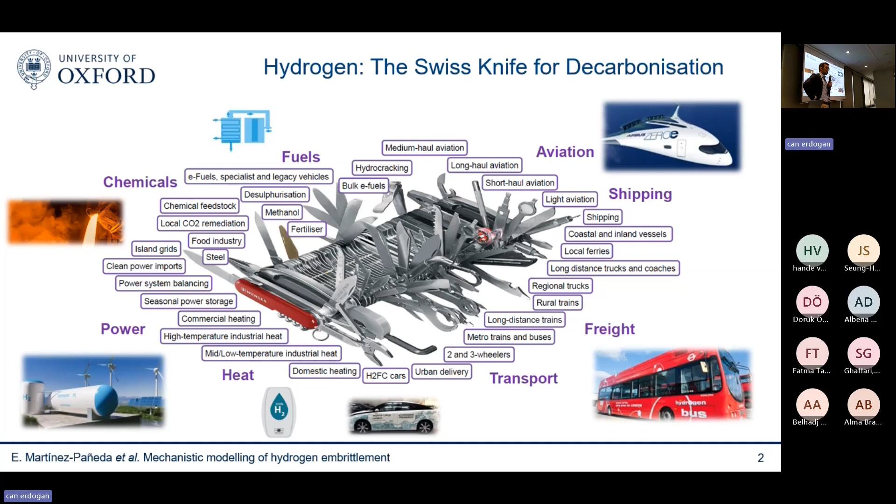You have probably seen in the news that there's significant interest in hydrogen these days, due to the fact that it has the potential to decarbonize many applications and sectors, including some known to be very difficult to decarbonize, such as aviation or steelmaking. We cannot think of any other alternative in that case. So it seems we are going to have to deploy, over the short term, a hydrogen energy infrastructure. And that's going to be a challenge, because we've known for quite a long time that hydrogen embrittles metals.

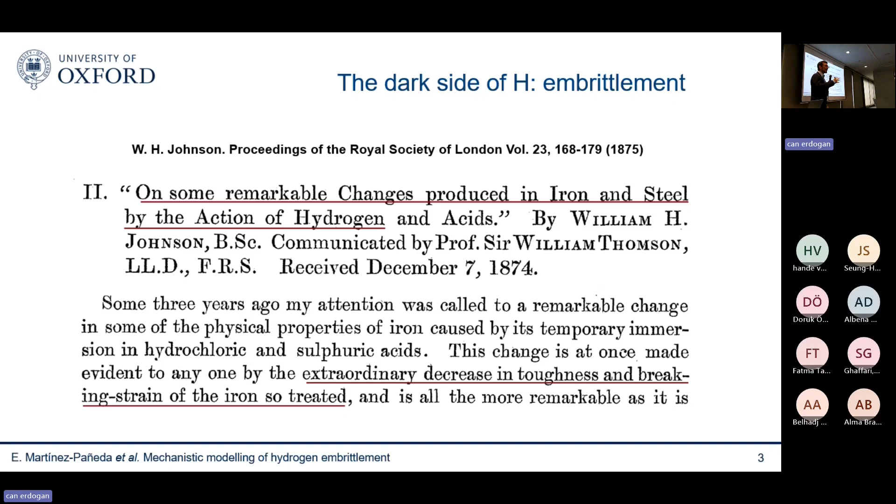This is something we've known for almost 150 years. Here is a paper by Johnson, published in the Proceedings of the Royal Society back in 1875. He talks about some remarkable and extraordinary decrease in toughness and breaking strain in iron and steel in the presence of hydrogen. In those days, you rarely see words such as 'remarkable' or 'extraordinary' in scientific papers. But the way hydrogen interacts with metals is indeed quite remarkable and extraordinary.

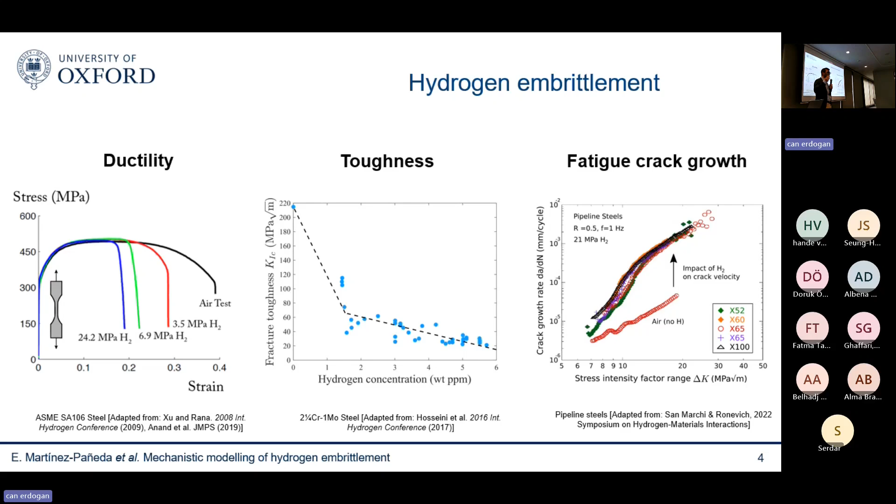So this is, of course, a problem because we need to develop this hydrogen energy infrastructure. This doesn't exist at the moment. Yet the materials we want to use for that infrastructure are going to be very susceptible to the presence of hydrogen. And it's a problem because we want to be able to predict these things quickly, to understand under what regimes of operation are safe. So that's an opportunity for models.

And of course, the fact that metals are so sensitive to hydrogen is a problem, and has been a problem for a very long time, particularly in oil and gas and quite aggressive environments. Now, with the development of high-strength steels, like the ones we heard about in the previous talk, we're seeing more susceptibility to hydrogen embrittlement, and this problem is expanding to other applications and sectors, for example civil engineering, construction, and even the automotive industry. Whenever you're using high-strength steels, you're going to have hydrogen problems.

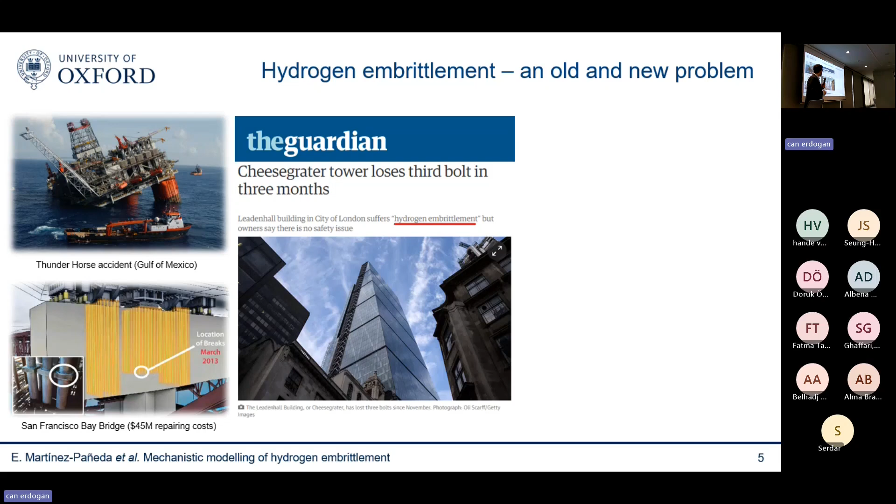Because again, hydrogen is everywhere. You can have hydrogen coming from humidity, from the manufacturing process, and so on and so forth. And of course, this is going to be a problem for what I discussed before: we need to deploy a hydrogen energy infrastructure, and accidents are going to happen.

This is very early days of the technology. Very few countries have started to develop a hydrogen energy infrastructure, and those who are doing it, like Norway, have already seen accidents as a result of hydrogen embrittlement.

So a lot of questions come to mind. You see here this newspaper article in the UK, from last year. They were hoping to have hydrogen gas in the natural gas pipelines. They have decided to wait one more year to fully understand under what conditions those pipelines will fail.

Again, this is an opportunity for modelers because we really need to make decisions quick, and we need to map a very wide range of situations that are not easy to test in a lab. This is full-scale engineering testing in a way. So it's also a big challenge for modelers, an opportunity and a challenge in that we need models to urgently map safe regimes of operation.

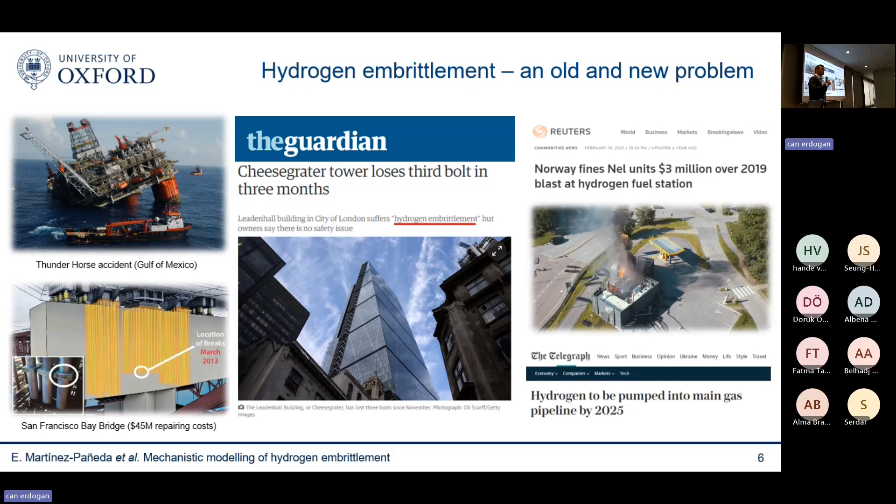To understand under what conditions we can transport and store hydrogen. But at the same time, we don't have the luxury to calibrate our models with experiments. We need to be very confident in our models because we need to predict things full scale without any sort of calibration or validation. So we tried to address that challenge in my group by trying to be as mechanistic as possible, trying to resolve the underlying physics as explicitly as we could.

I'll start by telling you a little bit of that modeling framework, which addresses each of the stages involved in hydrogen embrittlement. I'll then show some representative results, and then finish with two case studies that I hope will be of interest to you: can we predict hydrogen-assisted fatigue? These are very expensive experiments, difficult to reproduce, combining the complexity of both fatigue and hydrogen embrittlement. And also, can we determine safe regimes of operation to transport hydrogen in existing natural gas pipelines?

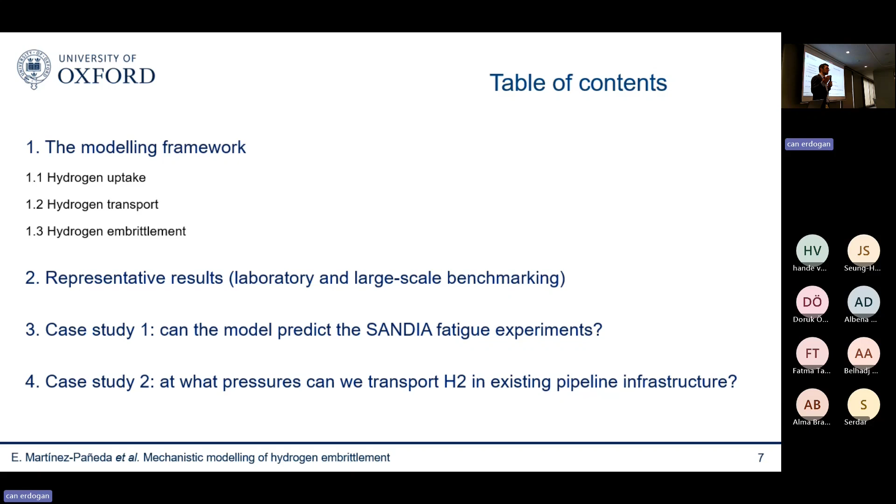So let me start by describing the modeling. The model has multiple ingredients, and I'll describe them based on the different stages. Whenever we want to understand hydrogen embrittlement, we need to understand the uptake of hydrogen in the metal, how much hydrogen is coming in, the transport of hydrogen within the metal, how it's structured in the microstructure, and then finally the embrittlement process per se, how the hydrogen nucleates and grows cracks inside of the metal.

The philosophy we try to take here is that in order to predict those full-scale engineering problems, we cannot rely on parameters that need calibration because we won't have the luxury to calibrate. So we try to maximize physics and minimize assumptions and parameters. At the end of the day, in an ideal world, we want a model that relies purely on material properties we understand and can independently measure, like Young's modulus, strain hardening exponent, diffusivity. Those things we like. We don't like alpha, beta parameters that need calibration.

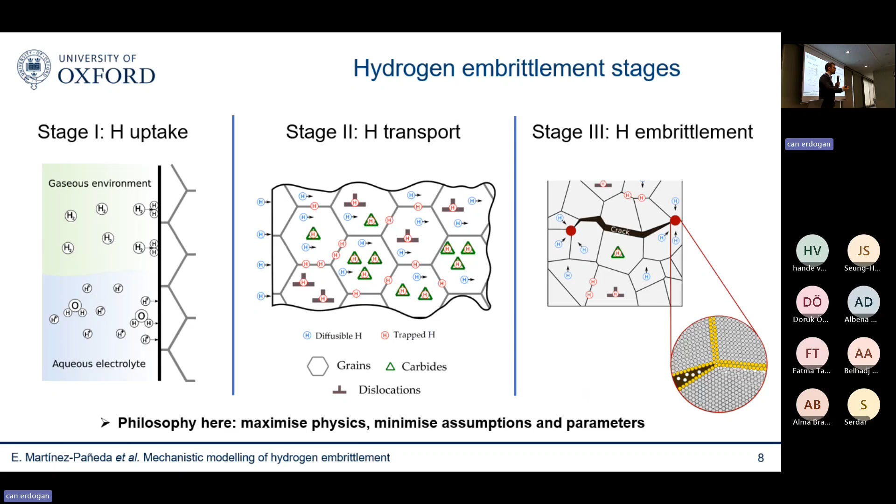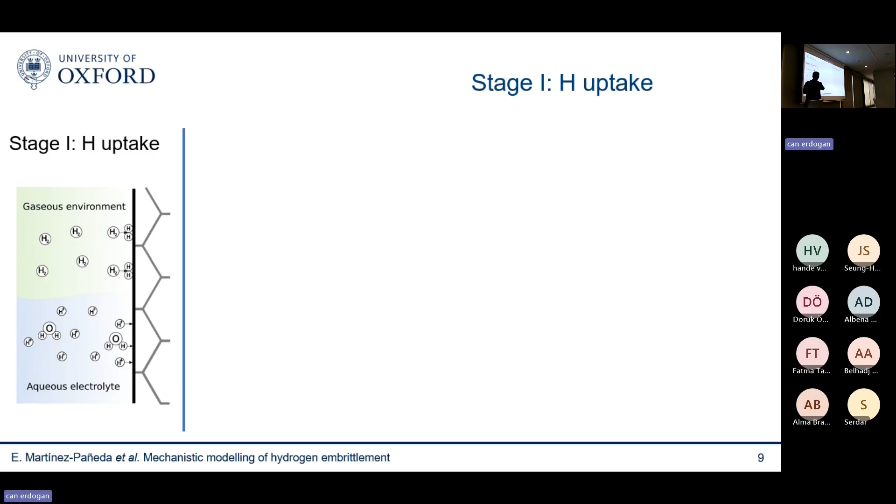So let me tell you a little bit of how we do this. First we go to hydrogen uptake. Here the goal is for a given environment, quantify what hydrogen you have in the subsurface of your metal, how much hydrogen is coming in. This is difficult because hydrogen comes from multiple sources, through forming, coating, plating, through exposure to any hydrogen containing molecule, through corrosion processes. Hydrogen can come from many places.

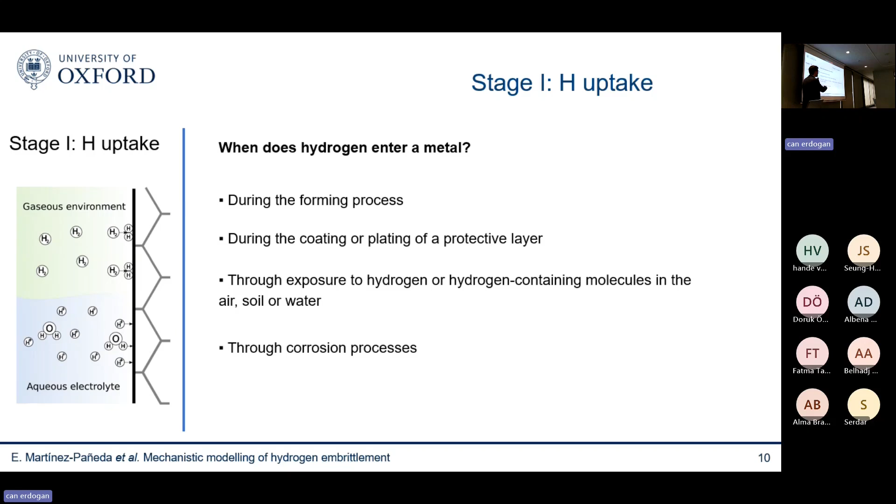I'll focus mainly on two scenarios. One, gaseous environment, relevant to energy applications whenever we have hydrogen gas coming in, or an aqueous electrolyte, the situation where you're exposing your metal maybe to seawater or any other aqueous electrolyte.

For the case of the gaseous environment, the good news is that under steady state conditions, there's a closed form solution, what we call Sievert's law. That basically relates the characteristic of the environment, the hydrogen pressure pH2, which you pick as an engineer, to your hydrogen concentration in the lattice, in the subsurface of your material. So this is good, it's an analytical expression. The only thing I'd like to say is that this depends on the solubility of your material, which you can measure with a permeation experiment, but it also depends on this exponential term, which has a hydrostatic stress term here.

I want to emphasize this because sometimes people in the community forget about the mechanics contribution, but the mechanics contribution can be quite strong. You cannot capture this when you do a permeation experiment, so one has to be very careful.

Whenever you're doing a permeation experiment, you're going to measure a stress-free solubility, but what you care about is how much hydrogen is coming in when you have a pressure vessel with a crack. And when you have a pressure vessel with a crack, you have an exponential term with a hydrostatic stress, which of course is going to be very large near cracks. So the mechanics contribution is important and should not be ignored.

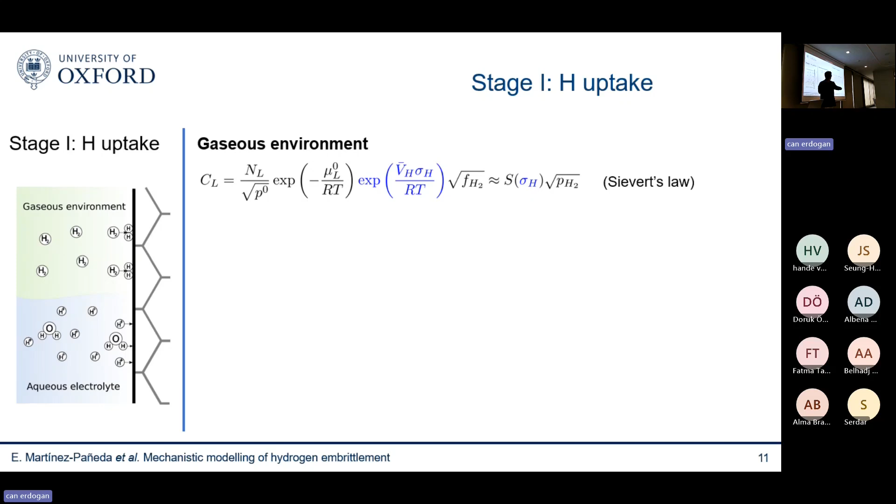But anyway, that's good news. This is a closed form solution. If I know my solubility, if my finite element tells me what is my hydrostatic stress, I know my pressure, I know my hydrogen concentration.

When we have aqueous electrolytes, the picture is much more complicated, and it's of interest for the energy application to understand the correlation between gaseous and aqueous electrolytes, because we are trying to use historical data. Running experiments on hydrogen gas is quite complicated, expensive, and a health and safety challenge. But running experiments with hydrogen from the aqueous electrolyte is much easier, and we have decades of experimental data from there. So we're trying to correlate both.

But it's difficult for two reasons. One is that you need to resolve not only the surface reactions, but also the electrochemistry of the electrolyte. Because, as anyone in the corrosion community will tell you, the conditions of the electrolyte in the bulk, where an engineer can measure them, are very different from those inside occluded electrochemistry, such as cracks or defects. So that's a challenge.

The good news is that we know how to express mathematically, from mesoscale first principles, what happens there. So we have Nernst-Planck equations, and these equations depend on diffusivity, Faraday's constant, temperature, and other physical quantities. Then you can also resolve the hydrogen evolution and absorption reactions happening at the crack tip.

So you can express this mathematically, implement it into your finite element code, and then you have a boundary value problem that looks like this, where you have an electrolyte where you're solving for as many ionic species as you need. Then you have a metal, which may contain a defect, where you're solving for your mechanical problem, for the hydrogen transport problem, and then you're solving for some interface reactions in between.

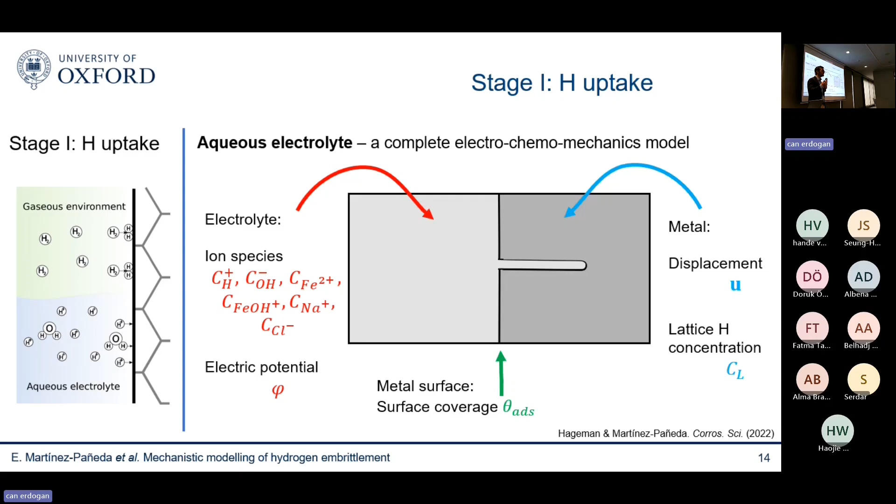All of these are degrees of freedom, and back in the day, or 10 years ago, it was difficult to solve a problem with 10 or 15 degrees of freedom per node, but now we can do those things much more conveniently. We've also done quite a lot of work on trying to accelerate those calculations with lumped integration schemes that I won't have time to discuss.

Anyway, once you solve the system, this is what you end up with. This is a typical quantity - you solve, for example, pH inside of the electrolyte. You can see that it changes quite dramatically inside of the crack compared to outside of the crack, as you would expect. Then you can predict the hydrogen uptake as a function of time, as a function of your material, as a function of the fluid flow, as a function of applied potential, and so on.

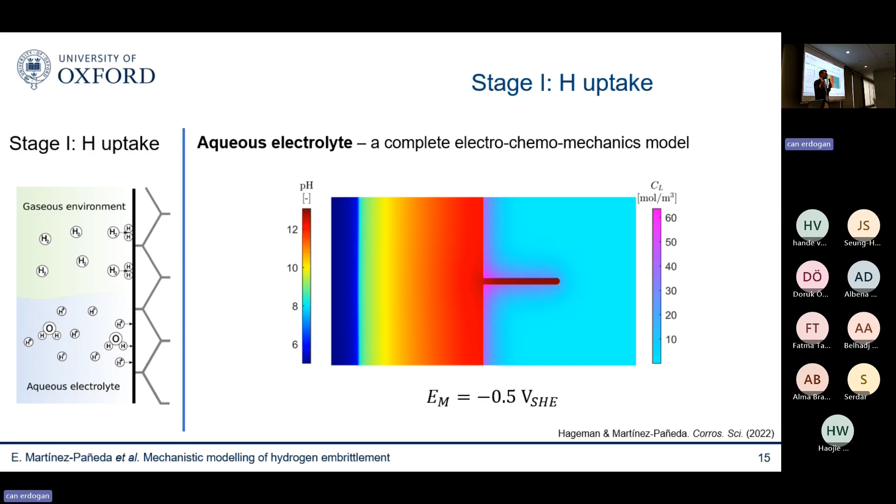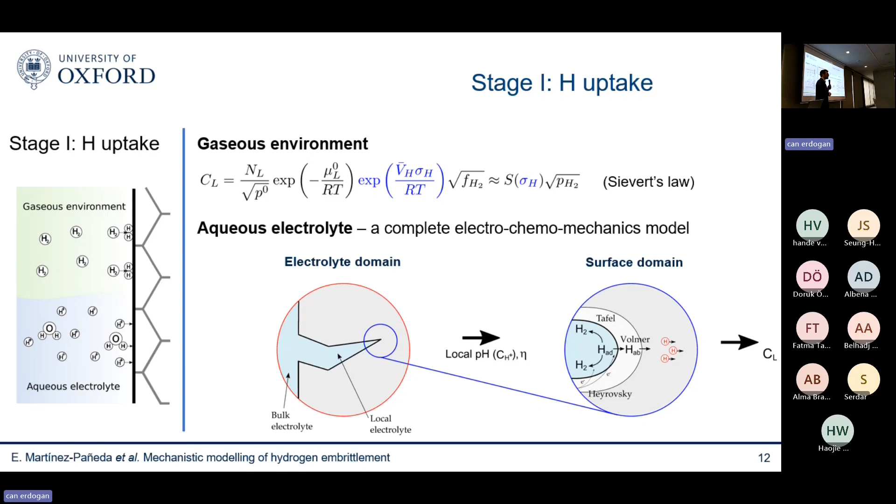This is just a representative result, but the end point is that for whatever environment you have, you're able to quantify hydrogen uptake. Then you can correlate that with SSRT flow, and you can also quantify how your electrochemical experiment gives you something similar to your hydrogen gas condition. Okay, so that's on the hydrogen uptake.

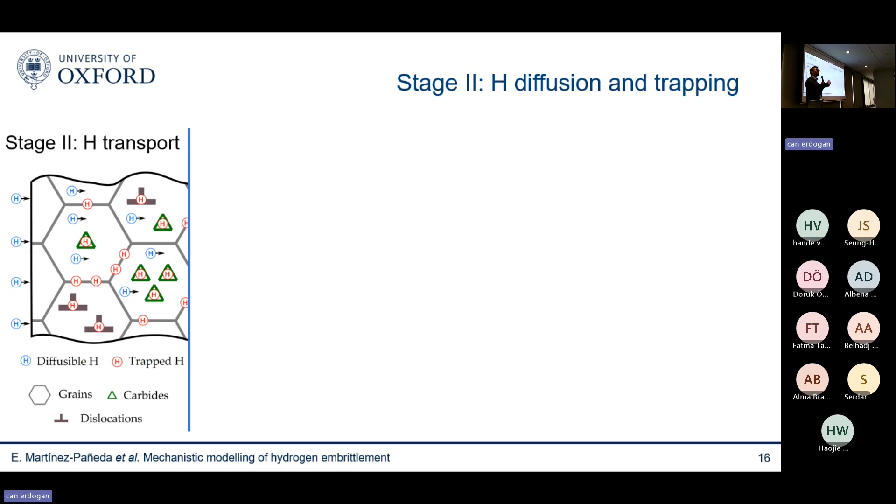So in theory, we have at least a method that is to a certain extent accurate in predicting hydrogen uptake. Now, once the hydrogen is inside the metal, the question becomes: how does hydrogen distribute within the component and within the microstructure? If we think of just hydrogen transport, it's relatively straightforward - it's described by an extension of Fick's law. So hydrogen is driven by gradients of concentration, and also gradients of the hydrostatic stress.

There's strong coupling with mechanics here, and this is a very important mechanical problem. If you solve this equation for the steady state condition, you end up with a situation where the hydrogen concentration depends on an exponential term involving the hydrostatic stress. So the hydrogen concentration is going to be very high near cracks and other stress concentrators. And this is only part of the picture.

Hydrogen not only travels freely through the crystal lattice, it's also sequestered. If you solve this straightforward equation, this coupled chemo-mechanical problem, in your finite element model, you get distributions of hydrogen concentration like this, for example in a pipeline with a weld. You can see how as you increase your pressure, the hydrogen diffuses through the weld, and you can do that also at microstructure scale. So this is relatively well understood.

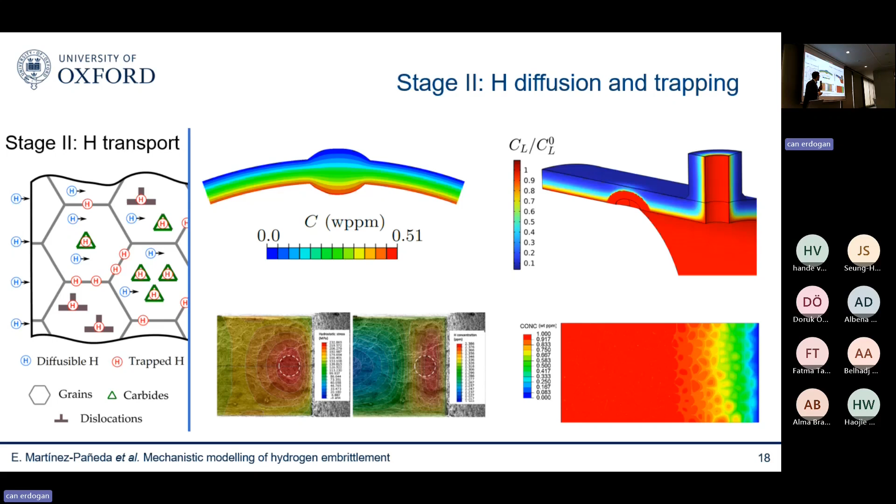Hydrogen is also sequestered or trapped on microstructural defects: grain boundaries, carbides, dislocations. So you need a theory that can encapsulate that, and we work with others on multi-trap theories based on Oriani or McNabb-Foster, where you incorporate the effect of each trap through binding energies that quantify how energetically favorable it is for hydrogen to sit in those places.

One aspect the community has overlooked is that if you want to know how much hydrogen is in your dislocation field, you must consider not only statistically stored dislocations but also GNDs, geometrically necessary dislocations. We heard in the previous talk about the importance of GNDs, and these are very important for hydrogen because, due to plastic strain gradients, they dominate near cracks and inclusions, and we can see this experimentally.

GNDs play a big role not only in quantifying how much hydrogen is in your dislocations, but also, as we heard in the previous talk, in strengthening and hardening mechanisms. GNDs act as obstacles to other dislocations, and that elevates stresses. This is something people have seen through a wide range of microscale experiments.

The implications in fracture mechanics are that if you look at the stress inside your crack, far away from the crack you can capture these GND effects through appropriate constitutive models, like strain gradient plasticity. Far from the crack tip these GND effects are small and can be neglected. But near the crack tip, because of very high plastic strain gradients, these GND effects become large, and your stresses end up much larger than those predicted using conventional theories like von Mises.

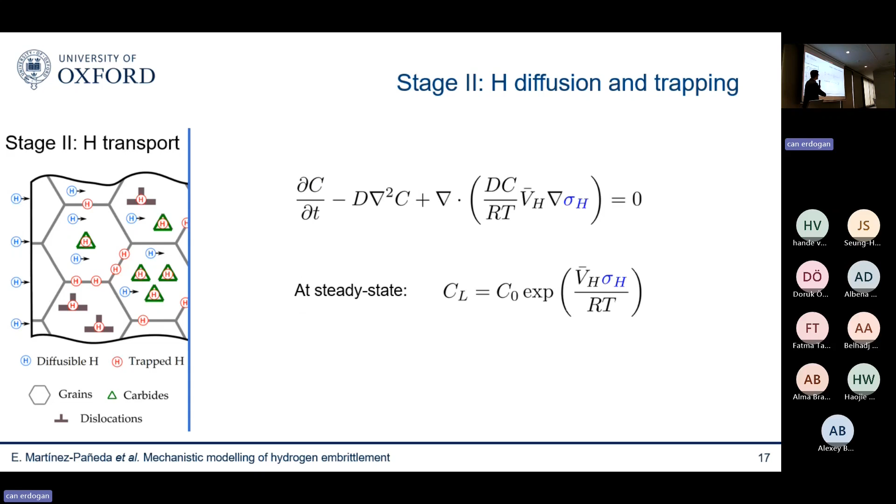This is very important for hydrogen because, going back to this equation, we have an exponential term that relies on the hydrostatic stress. So the hydrogen concentration is going to be much, much higher near the crack tip. As you'll see later, this is important for rationalizing the underlying physical mechanisms that drive hydrogen.

We've seen when running simulations combining these coupled chemo-mechanical models that account for the GND effects, for these strain gradient plasticity effects, that this is the only way to get good agreement with experiments. It's difficult to measure hydrogen concentration ahead of the crack, but some people have done it, and only by accounting for these GND effects are we able to capture the very high hydrogen concentrations that experiments show near crack tips.

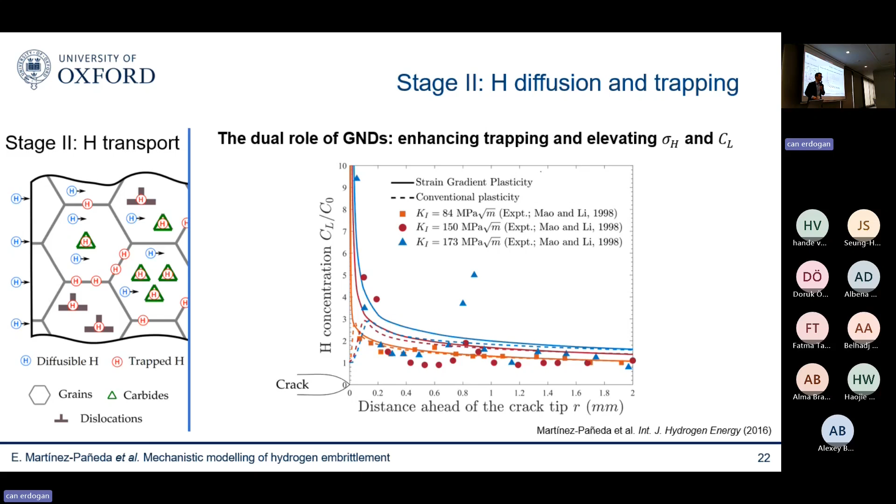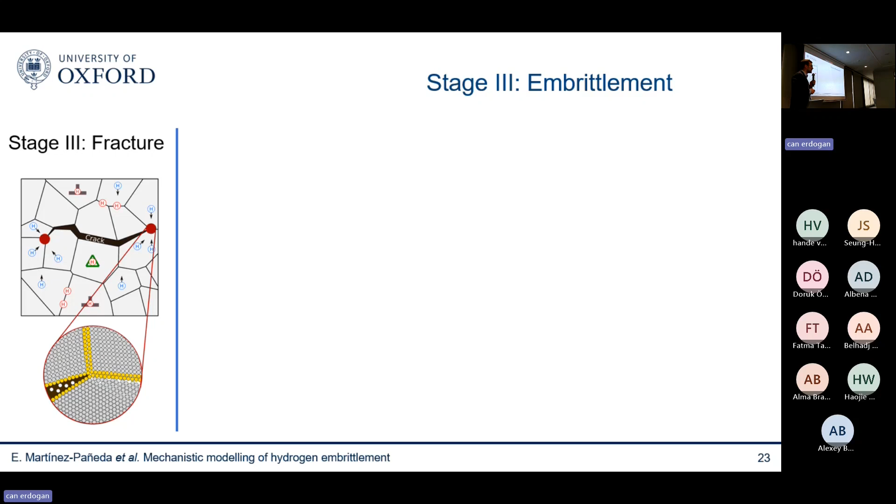Okay, so now we're moving to the embrittlement part. We know where the hydrogen is distributed within the component, and we also know where it's distributed within the microstructure, based on those binding energies I mentioned before. So now, what happens with the cracking process? I think there are two types of challenges in trying to predict when hydrogen embrittlement occurs. One is a physical challenge: what is hydrogen actually doing that facilitates the nucleation and growth of cracks?

The other challenge is computational: how are we going to couple this evolution of cracks through a component computation? These are interfaces, discontinuities. For that, we use phase field models that have been used in many science and engineering problems.

The idea is quite simple. You overcome the mathematical and computational challenges of tracking discontinuous interfaces by smearing that interface over a finite domain and using an auxiliary variable, the phase field, to tell you where the interface lies. The phase field takes a distinct value in each phase, say 0 in the blue phase, 1 in the red phase, and varies smoothly in between. If you define a suitable differential equation for the evolution of this phase field, you're able to capture interfacial problems of arbitrary complexity.

This implicit representation of interfaces is also very convenient for fracture problems, because you're defining your fracture equation, your interface equation, over the entire domain. So there's no need for any special treatment. Topological changes such as divisions or merging of interfaces, like crack coalescence or crack branching, are naturally captured without any ad hoc treatment. And finally, it's very well suited for multiphysics problems because you can combine this crack equation with any other equation you're interested in, like hydrogen transport or uptake.

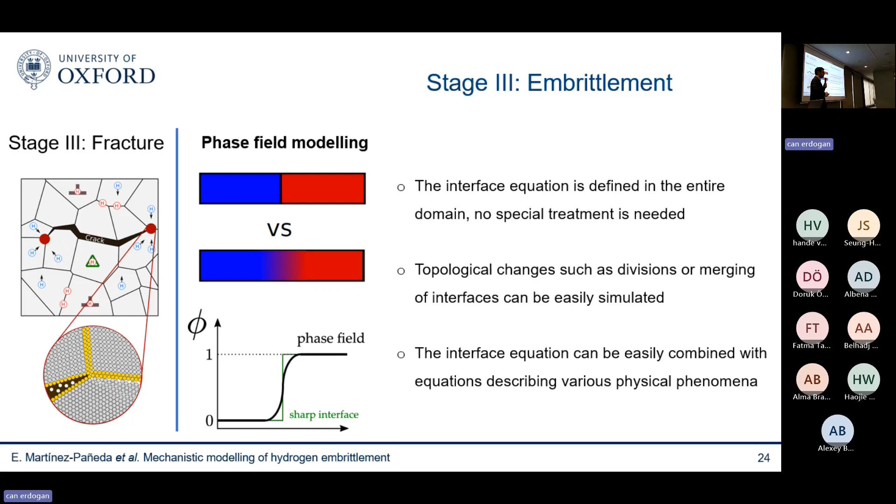Phase field modeling has really been a revolution in many areas of science and engineering. It all started in microstructural evolution, and it's now by far the most widely used technique to simulate solidification. We're interested in its application to fracture mechanics, but it's quickly becoming the dominant technique there too.

You can see why here—this is the outcome of a simulation of a hydraulic fracture process. That's why you see such a funny crack branching pattern. The model is able to capture very complicated behavior: branching, nucleation of secondary cracks, and coalescence of multiple cracks.

Also, recently—though I won't have time to discuss it today—we've shown that the phase field paradigm can be used to simulate corrosion. You can use the phase field to track the evolution of the corrosion front, the interface between the aqueous electrolyte, like seawater, and the metal, and how that electrolyte-metal interface evolves.

But I'm going to focus today on fracture. Going back to what I said before, the two challenging aspects of this problem are: first, mathematically, it's difficult to predict cracks, and now it seems we finally have a tool that allows us to do so.

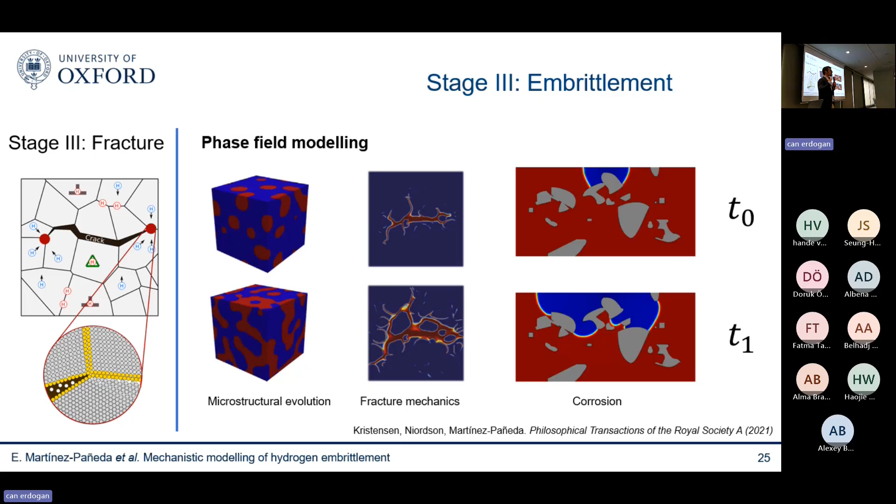The other aspect is that the method has to be physically sound—these nice colors need to correspond to reality. I think the phase field is a nice platform for that, because it allows you to incorporate Griffith's energy balance, going back to the foundations of fracture mechanics and the thermodynamics of fracture.

For a crack to grow, the energy stored in the material has to be equal to or larger than the energy required to create new surfaces—the fracture energy, or critical energy release rate. You can express this as a variational form, and if you're able to minimize this functional, you can predict the evolution of cracks as an exchange between stored energy and fracture energy.

But this is tricky because you don't know where your crack lies. So here's where you make use of a phase field to enable the regularization of this functional and predict the evolution of cracks, again as an exchange between fracture energy and stored energy, in agreement with thermodynamics.

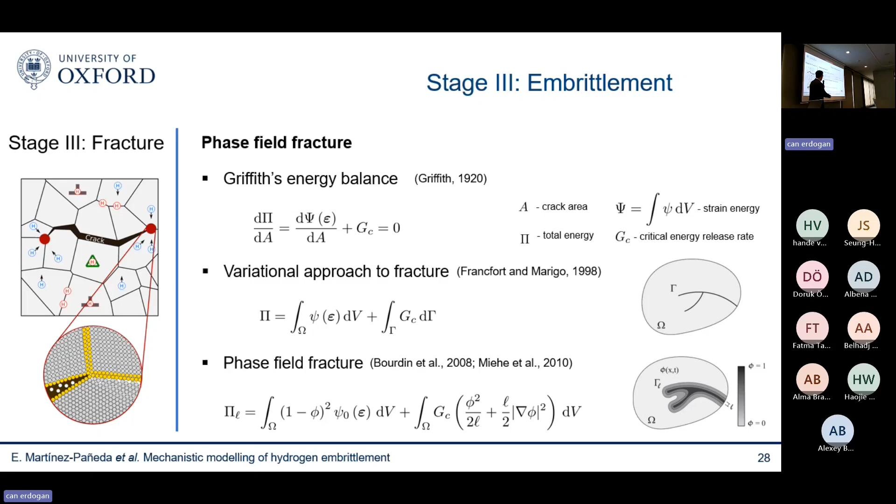The phase field is a little like a damage variable—you go from 0 in intact material points to 1 in fully cracked material points. It's similar to a non-local continuum damage mechanics model, with a length scale that makes it mesh objective, so your results are mesh independent if your mesh is fine enough. It also degrades the load-carrying capacity of the material, like a damage variable.

You get a good overview if you look at the balance equations here. On top, you have the balance of linear momentum—the standard equation you solve in deformation problems, with the phase field degrading the load-carrying capacity.

And then you have another equation that describes the evolution of this phase field. This is basically a competition between the energy stored in the material, which depends on mechanical straining, and the fracture energy, the toughness, a material property that we can easily measure.

Just by solving this differential equation, you can capture very complicated cracking patterns on the original finite element mesh and without any convergence problems. The method is very robust.

I won't have time to discuss the numerics, but there's a lot of work going on there—they adopt quasi-Newton schemes that make it very robust. Here you see, by the way, crack branching due to the application of a dynamic load. I'm going to use red color to denote cracks and blue color to denote intact material.

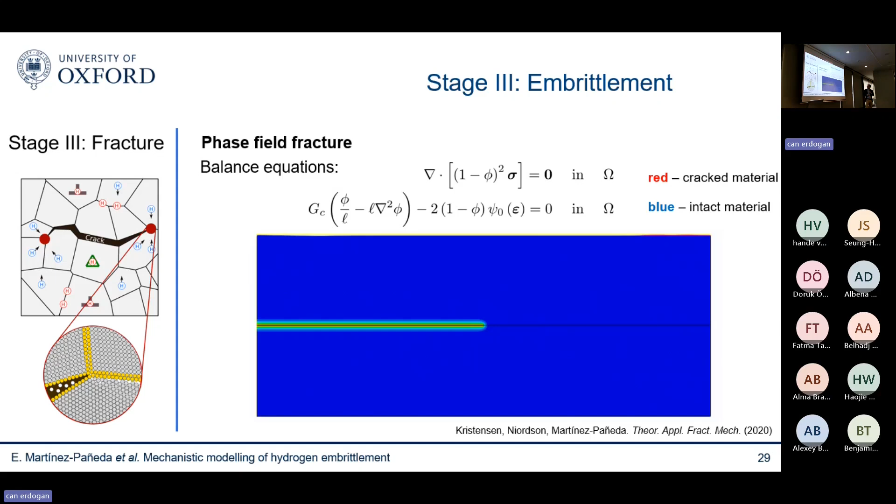So this is the takeaway: the method, in my opinion, is physically sound and computationally very robust. So I think we're well equipped.

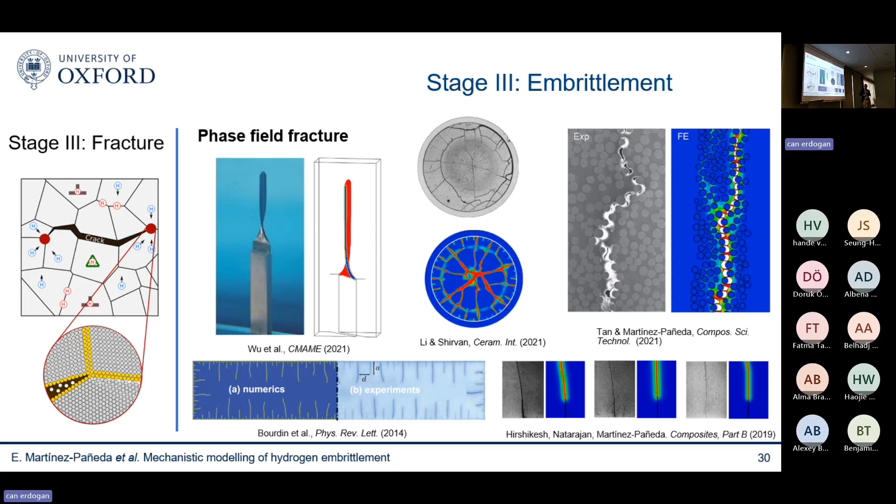But the most important coupling is, of course, how hydrogen degrades your fracture energy. How does hydrogen embrittle metals? There are many ways you can do that. Of course, we know from experiments that this is the case—I showed you some data before.

And this is a lot of what industry or industry collaborators do. They have a lot of toughness versus hydrogen concentration data, so they can just feed the data in and input that as a function. But of course, at the end of the day, what we want is to develop a mechanistic model, a purely mechanistic model, that is able to capture the physics of the underlying process.

The good thing is that the framework is universal, so to speak. For any mechanistic interpretation, you have a hydrogen degradation function that you can make dependent on any macro or micro mechanical variable you might be interested in. I've seen that a lot of groups have taken this framework and extended it to different physical interpretations of hydrogen.

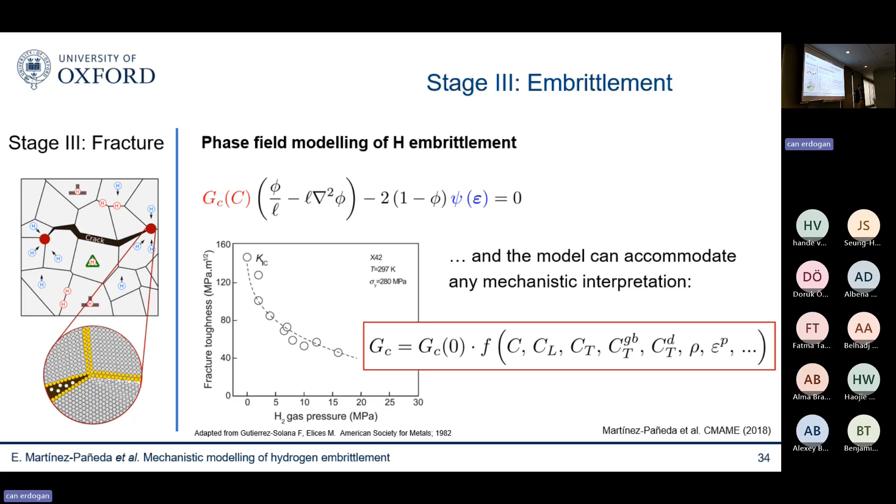Let me tell you what I think is happening. If you were to develop a mechanistic degradation function for hydrogen embrittlement, the key question to answer is: how does hydrogen make metal break? How can it be that the same material in the absence of hydrogen fails in a very ductile fashion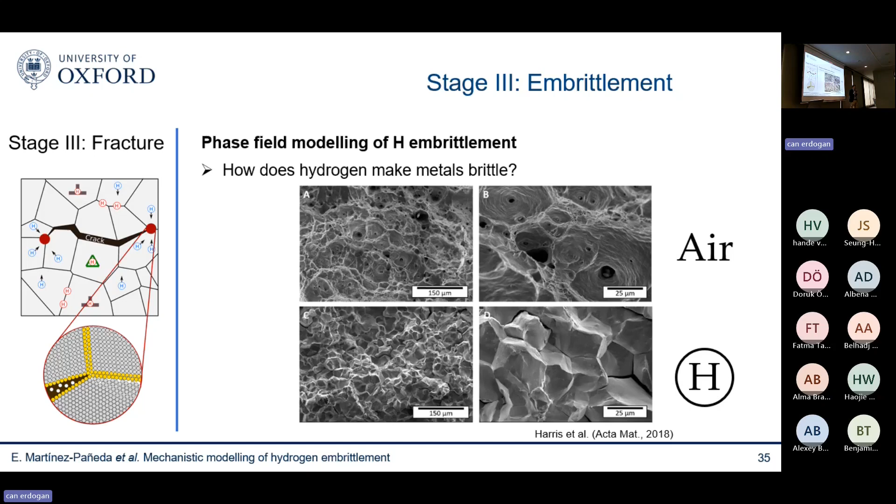through micro void growth and coalescence mechanisms, and the moment you bring hydrogen into the picture, it fails in a very brittle way, through, as you see here, intergranular cracking mechanisms. So what is happening in between? In my opinion, in summary, there are three key ideas to understand this.

The first one is that when you look at the problem at the atomic scale—for example, we're running DFT calculations—you can see that the surface energy, or the fracture energy, of your metal is very significantly degraded with hydrogen. This is surface energy versus hydrogen occupancy for nickel. These are DFT calculations for two types of grain boundaries in nickel.

You can see that if your grain boundary happens to be full of hydrogen, an occupancy of one, then you're reducing your fracture energy by 40%. So now the next question becomes: okay, this seems like a possible scenario—if my grain boundary is full of hydrogen, it's going to be much weaker.

But how much hydrogen is actually in my grain boundary? Because if I'm somewhere here, then this is a secondary effect. The answer comes from the chemistry of thermodynamics, I said before. How likely this hydrogen is to go to a certain microstructural defect depends on that binding energy, and we can measure that experimentally.

We know that for grain boundaries, which are strong traps, we have binding energies of -40 or smaller, so we are somewhere here. Here you can see a plot of Oriani's equilibrium where you see trap occupancy. Yellow means fully occupied, blue means empty. This is the lattice hydrogen concentration, and this is the binding energy. So for grain boundary, we're somewhere here.

You can see that for typical hydrogen concentrations like 1 ppm, your grain boundary is essentially full. Even at 0.1 ppm, your grain boundary is almost full. So it is energetically favorable for the hydrogen to sit in those grain boundaries, to accumulate in those defects. We have seen in atomistics that when we do that, we have a 40% reduction of the binding energy of the grain boundary strength.

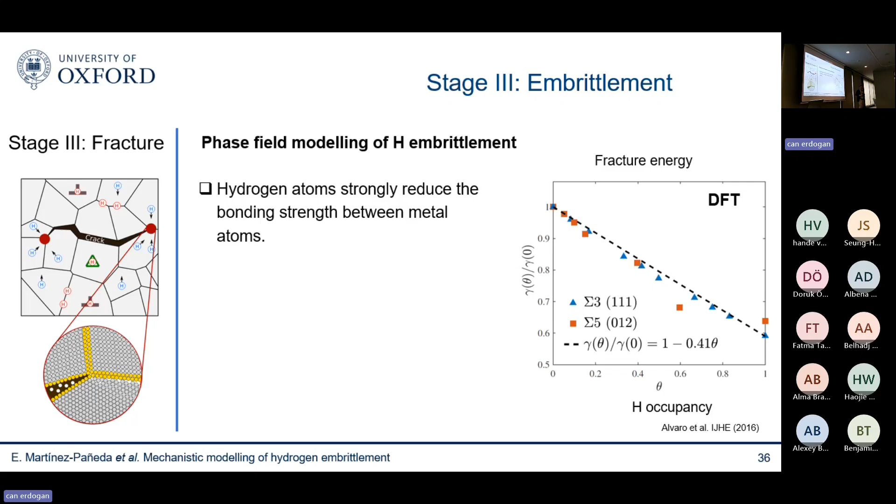So the last question is, what happens? Can you actually go from micro-void cracking mechanisms to brittle mechanisms just by lowering your grain boundary strength by 30 to 40%? This is tricky because the grain boundary strength is 10 times the yield stress or so. So if you bring it to 6-7 times the yield stress, it still is quite a high value.

But what we see is that when we account for those GND effects I mentioned before, for those plastic strain gradients, your hydrogen content is big enough and your stresses are big enough that this cleavage strength, which you don't normally reach in the absence of hydrogen—hence why you need the ductile micro-void mechanisms—is lowered. Your stresses cross, these two lines cross, and then you have cleavage.

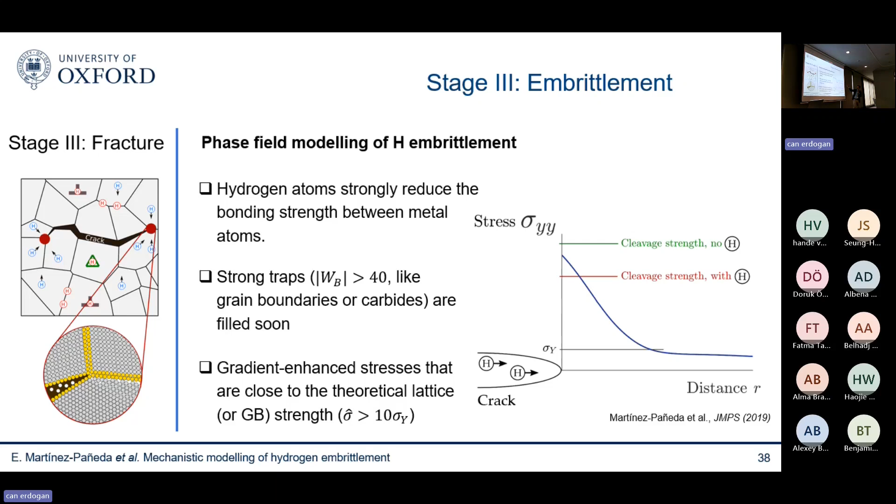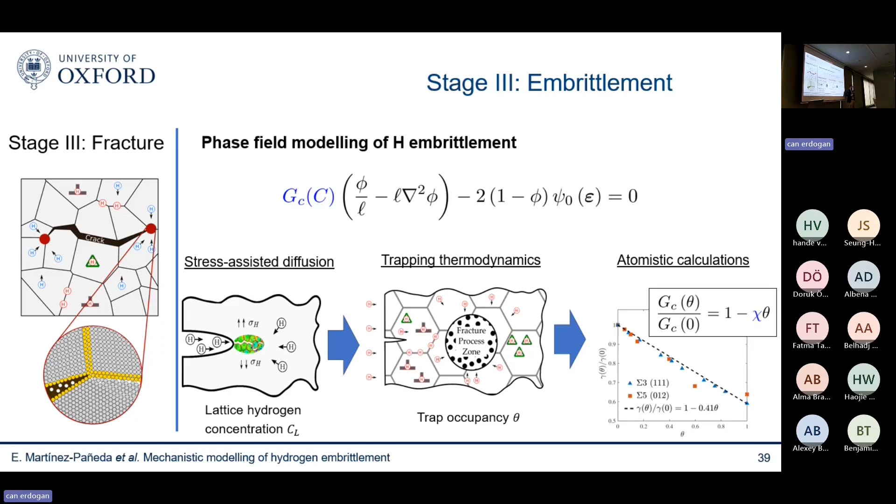You have a model that just by running one atomistic simulation offline, without any fitting coefficients, is able to naturally predict the shift from ductile to brittle. This is straightforward to incorporate into these phase field models because we are solving a hydrogen transport problem, so we know the hydrogen concentration. Through thermodynamics of trapping, we can relate that to the hydrogen occupancy in the different microstructures at our critical interfaces. Then we just go to atomistics with whatever coverage you have, and we reduce the fracture energy that goes into the phase field equation. So it's very straightforward to incorporate this.

Okay, so let me tell you some examples of how this model works. First, I'm going to show some results here. These are some representative comparisons with the experiments.

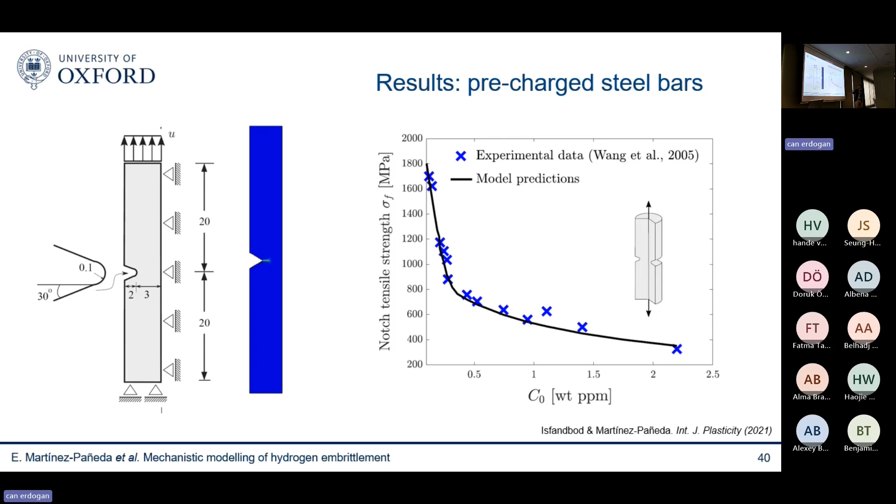These are pre-charged steel bars. I think it's duplex stainless steel—no, these are high-strength steels. You can see that they measure the notch strength versus the hydrogen content. Again, the symbols are the experiments, and you can see that the phase field model seems to deliver good agreement across a very wide range of hydrogen concentrations.

These are another set of experiments done in Norway. Here, what they have is duplex stainless steels. They are subjected to a constant load and immersed in a seawater bath. Then what they do is introduce hydrogen through these cathodic reactions, apply the constant load, and quantify the time to failure.

Each of those samples is loaded at a different load, so they were hoping that one of them was loaded at a load small enough not to see embrittlement. That did not happen—as you can see here, the symbols of experiments, all of them failed relatively early for engineering standards. But we can take the model and not only reproduce the experiments, but also run large-scale simulations over large time scales and predict this embrittlement region, the load below which you will not see embrittlement.

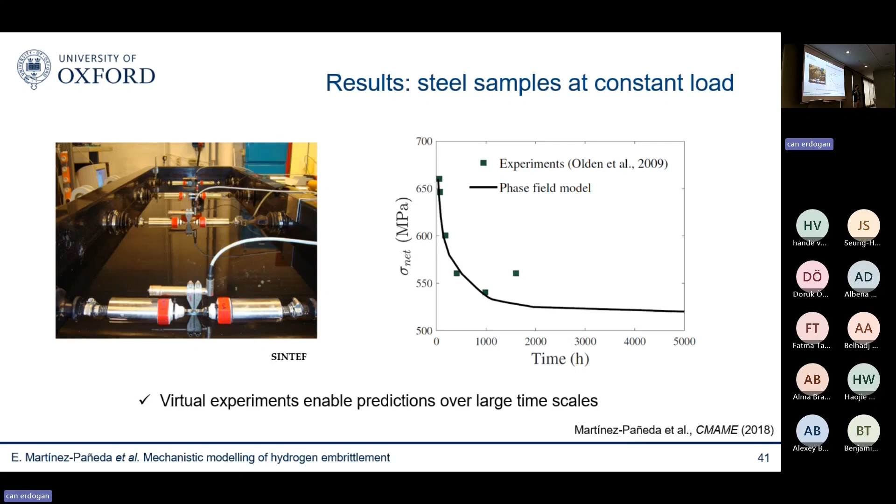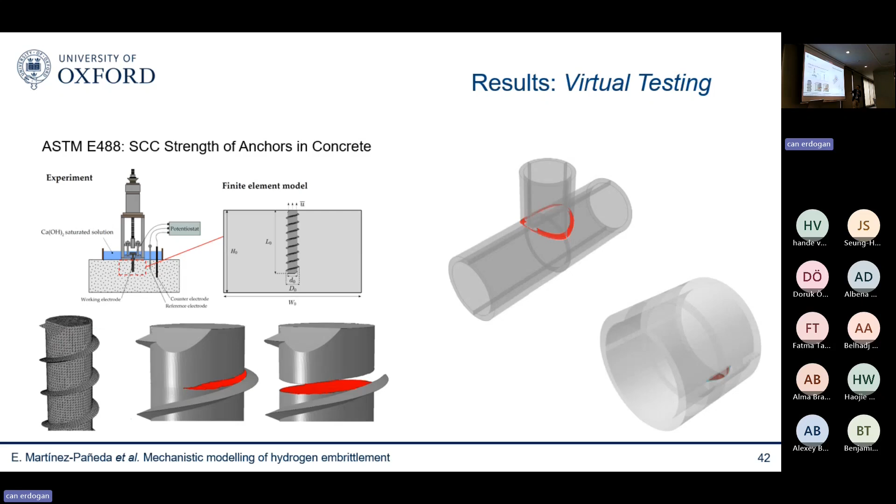So at the end of the day, this is a multi-scale informed, but ultimately macroscopic continuum model. So it's easy to run those kinds of large-scale simulations. This is something we have exploited to bring this idea of virtual testing to the hydrogen energy sector, because with these continuum-like fundamental models, we can solve problems of any dimension and choice. These are some 3D problems that we have shown here. In fact, we can also create some sort of digital twins of critical infrastructure.

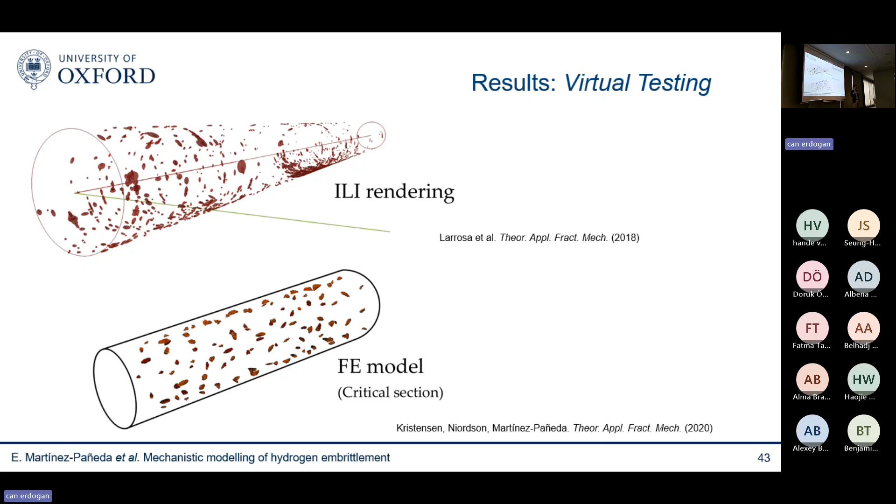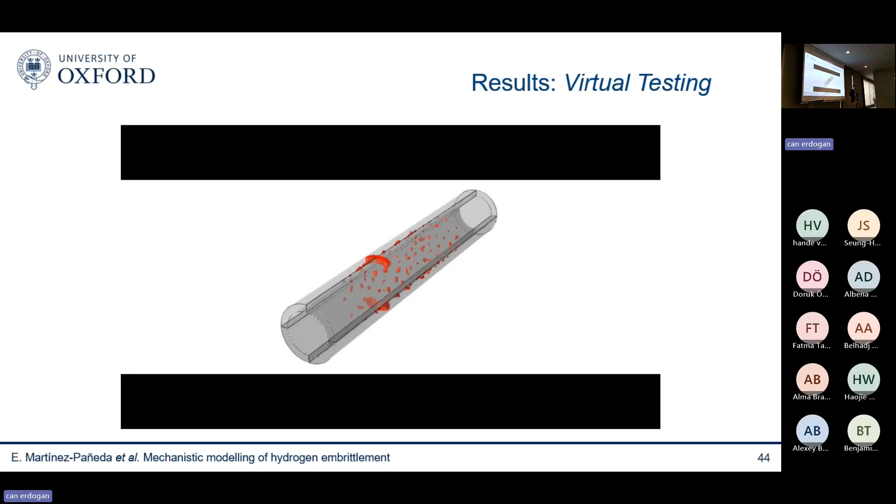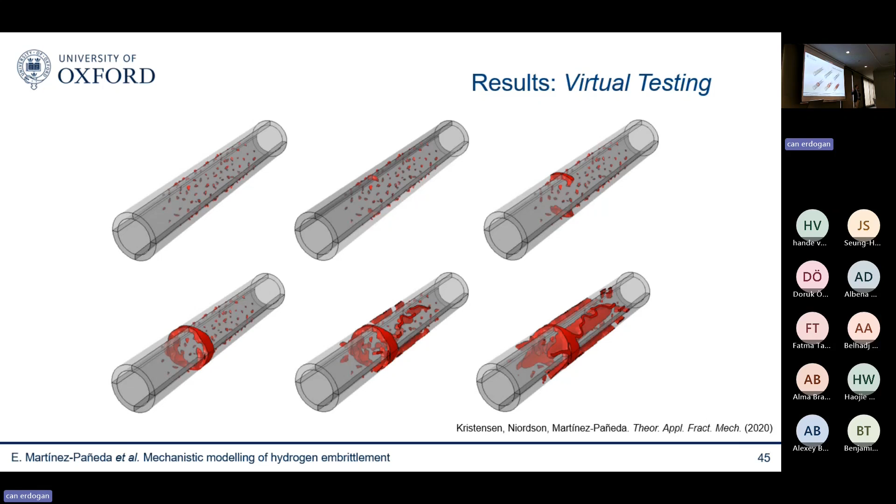So the takeaway I want to say is that we have, as physically as we can at the continuum level, a physically informed model that is able to predict hydrogen-assisted failures at scales and conditions relevant to engineering practice. So no matter the complexity of your problem, at the component level, you can predict fracture through this combination of electro-chemo-mechanical models.

And we have also extended this to fatigue. There's a growing area of fatigue, where the idea is that you have a fatigue degradation function. So not only do you degrade the toughness of your material through hydrogen, but you have a variable that accumulates with your cycle loading that degrades your fracture toughness. And when you do that, the price to pay is that you need to add 2 parameters to your model that quantify how susceptible your material is to cyclic load, basically cyclic damage.

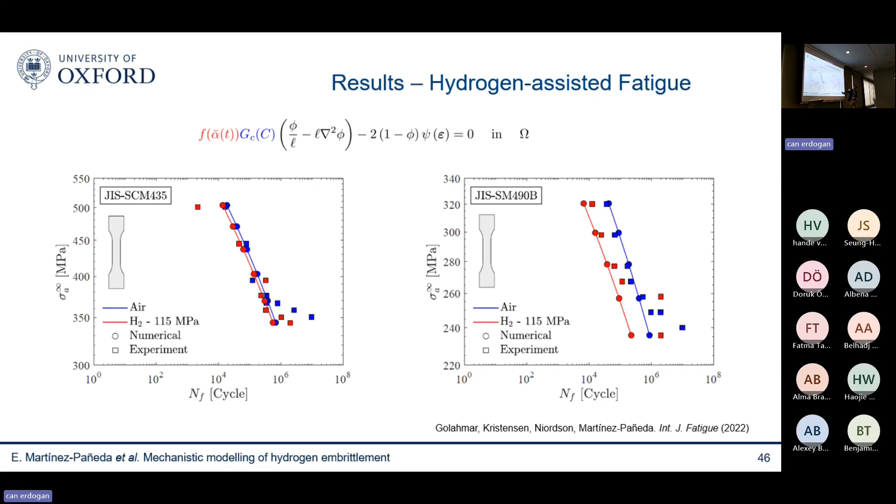When you do that, you can see that we can capture SN curves with and without hydrogen with relatively good agreement. You can also obtain as an output of the model the Paris law behavior—we don't give the Paris law behavior as an input. The model tells you what the Paris law constants are as a function of the environment or anything you're interested in. You can also compute virtual SN curves for any arbitrary choice of environment and geometry, notch component, applied load, and load history.

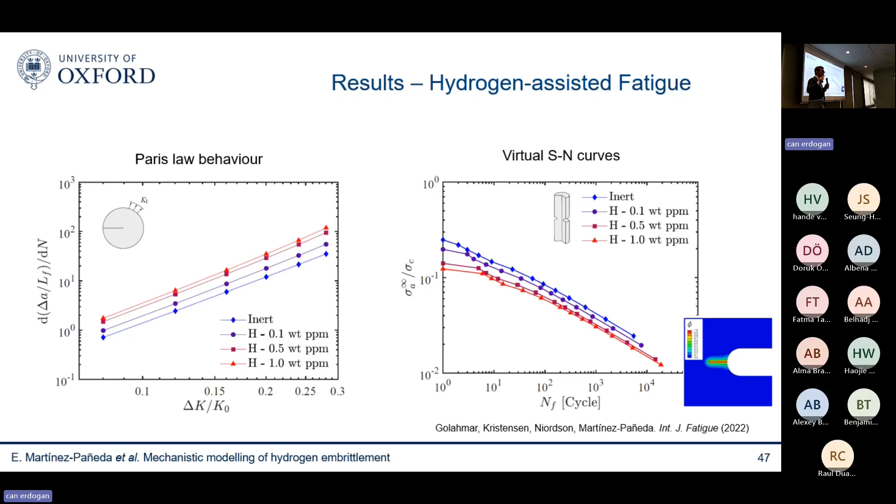And these, by the way, are cycle-by-cycle calculations, which are very powerful because then you don't have to apply superposition—you cannot apply superposition when you have hydrogen. But at the same time, they're computationally heavy. Again, a lot of work is going on to accelerate those calculations, but now we're able to do millions of cycles in 3D. So I think we're getting to a point where we can handle large scale problems.

So let me finish with these 2 case studies that I hope will be of interest to you. The first is related to hydrogen-assisted fatigue. A lot of these applications in energy involve components that are subjected not only to hydrogen gas, but to cyclic loads. Most engineering components are subjected to cyclic loads, and identifying the behavior of metals under hydrogen and cyclic loads is quite challenging.

These are experiments conducted by Sandia, fatigue crack growth rates, done at Sandia National Labs. They have data for different hydrogen pressures, up to 100 megapascals, and different load ratios and frequencies. This data is very valuable—this is what engineers are using these days to design hydrogen energy infrastructure. But it's also very difficult to get. There are only about 5 labs in the entire world able to run experiments at these pressures and cyclic loads, so it's expensive and difficult to obtain.

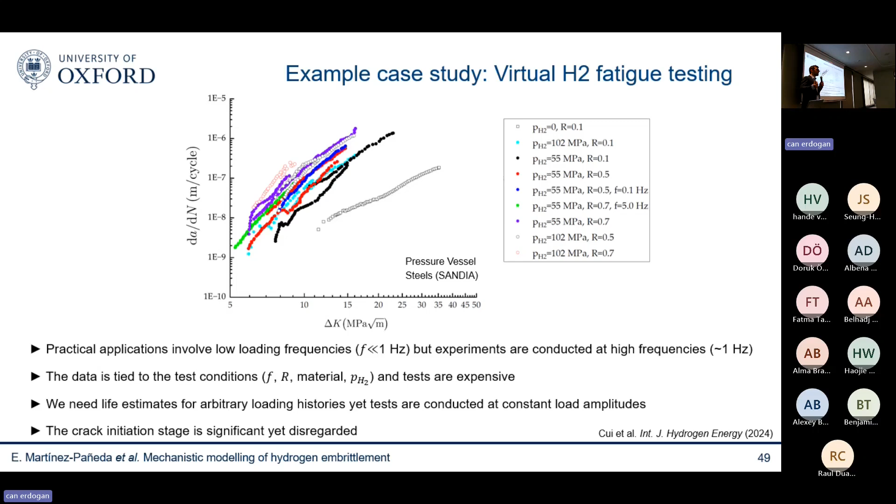There's quite a challenge to run experiments at 100 megapascals of hydrogen pressure, and this data has some issues as well—that's why industry partners approached us with this. One issue is the frequency effect. Normally in fatigue, we don't care about frequency, but the moment you have hydrogen, if you load very slowly, there's more time for hydrogen to accumulate. If you load very fast, the hydrogen doesn't have time to move. So there's a frequency effect.

We know that the slower we load, the more susceptible we are to hydrogen embrittlement. So you want to run your experiments at the frequency of your application. But the application involves very low frequencies, and these experiments are very expensive, so we run them at high frequencies. This makes us non-conservative, and the industry is worried: what is the error we're making by running experiments at very high frequency?

The other problem is that each of these curves is tied to the test condition. Each curve is valid for a given material, a given frequency, a given load ratio, a given hydrogen pressure, and these tests are expensive. So we want a tool that allows us to interpolate between the data and extrapolate beyond the data.

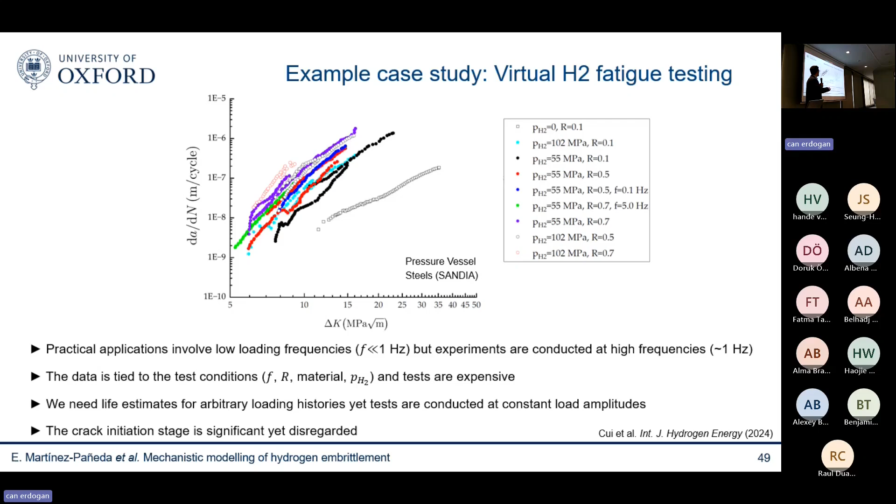And then, of course, we need estimates for arbitrary loading histories. This is for a constant applied range. Also, we are disregarding the crack initiation stage, and we need tools that are able to predict crack initiation.

So we did an interesting study with an industrial partner, where they released the data to us little by little. They said, okay, you guys claim to have a model that is able to predict things, so let's see how far you can get.

First we said, okay, we understand that you have a phase field fatigue model that relies on 2 parameters that you don't fully understand. These 2 parameters, I must confess, this is a growing field. We know they quantify the susceptibility to cyclic damage of a material, but I don't know very well what they mean. It's not like Young's modulus.

So they said, okay, we're going to give you the data in air. This is for a pressure vessel steel, and I'm going to let you fit those 2 parameters. So we run our virtual experiment - this is my compact tension virtual experiment. I see my crack growth, and of course I get an excellent agreement with experiments because I'm fitting those 2 parameters. There's no hydrogen here, I'm just fitting those 2 parameters.

Okay, so now there's no more fitting. Now we have some hydrogen data at 55 megapascals. We can use that Sieverts' law flow that I showed you before. We convert 55 megapascals into a concentration. We impose that as a boundary condition. We do not touch anything in our model. We don't recalibrate anything, we do not change any of the parameters, and we run the simulation. This is what came out of the simulation. So we were quite happy.

And then they said, oh, we also have data at 102 megapascals. So please run a simulation at 102 megapascals. Again, you're not allowed to touch anything, you're not allowed to recalibrate anything. The only thing you do is change your boundary condition. We know from Sieverts' law what is the concentration associated with 102 megapascals. We put it in there, we run our simulation, we put it together, and this is how it looks. So we're well happy about it.

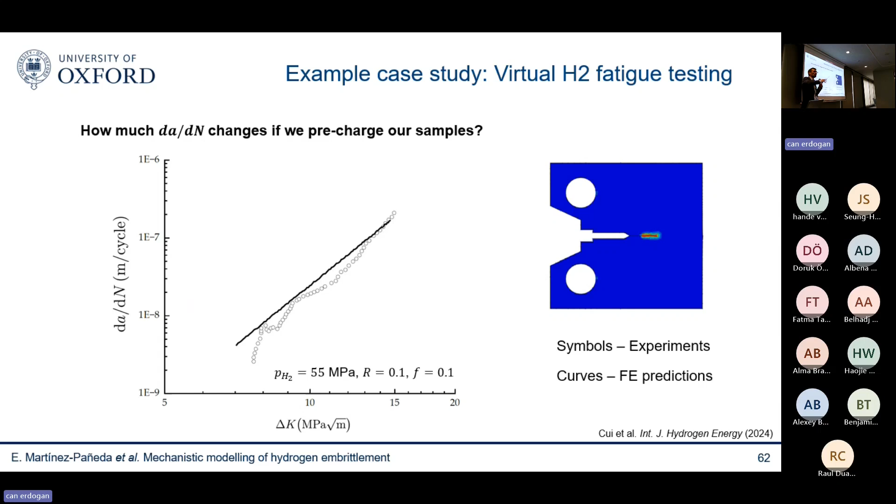And now we use the model to try to understand things. So one of the problems with these experiments is that because they're expensive and take time, they do not expose the sample to hydrogen and then do the mechanical test - they do both at the same time. And this is a problem because in practical applications, pressure vessels, pipelines, they're going to be exposed to hydrogen for a long time. So we can do that easily in our model.

So we just expose our compact tension sample to hydrogen. We let the hydrogen redistribute in the model, and then once it's completely uniformly distributed, we run our virtual test experiment. And what we see is that you get an elevation of 2.5 times the fatigue crack growth rate.

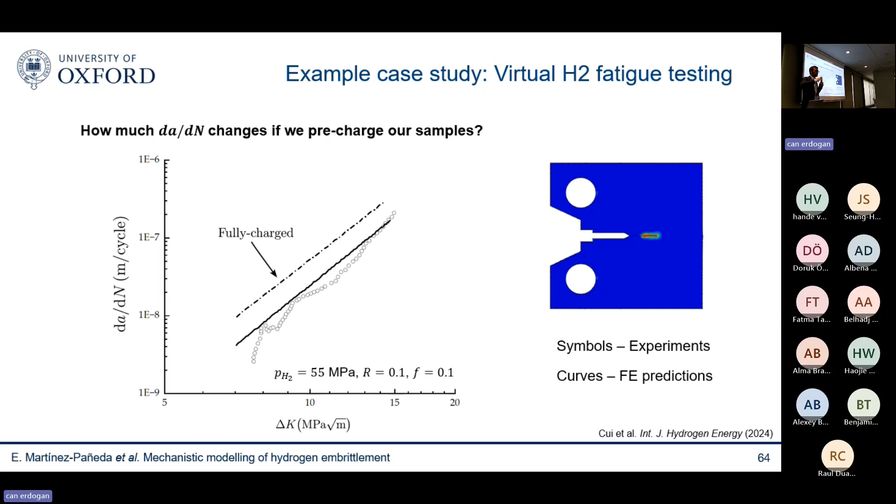So it's up to you as an engineer to decide whether this is a big change or a small change.

The other thing we were very interested in is changing the frequency. In the real application, we work at very low frequencies, but experiments are done at high frequencies. So we are able to do that with the model, and sometimes they run experiments at low frequencies.

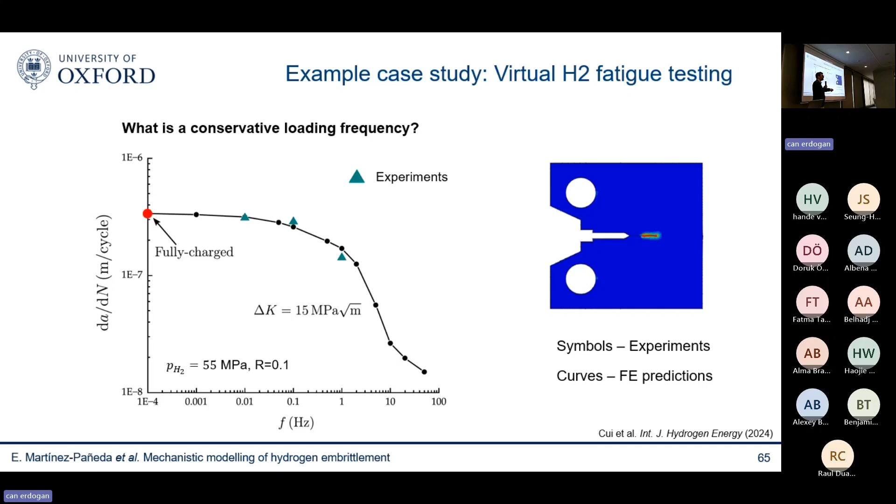We were able to actually show that the model agrees quite well with experiments at low frequencies, and predict what happens in the regime where they'll basically be running their pipelines and pressure vessels. Last but not least, there are experiments done in Japan on full-scale tests with the full pressure vessel that fails after hundreds or thousands of cycles. They did this for 2 types of alloys and 2 types of notches.

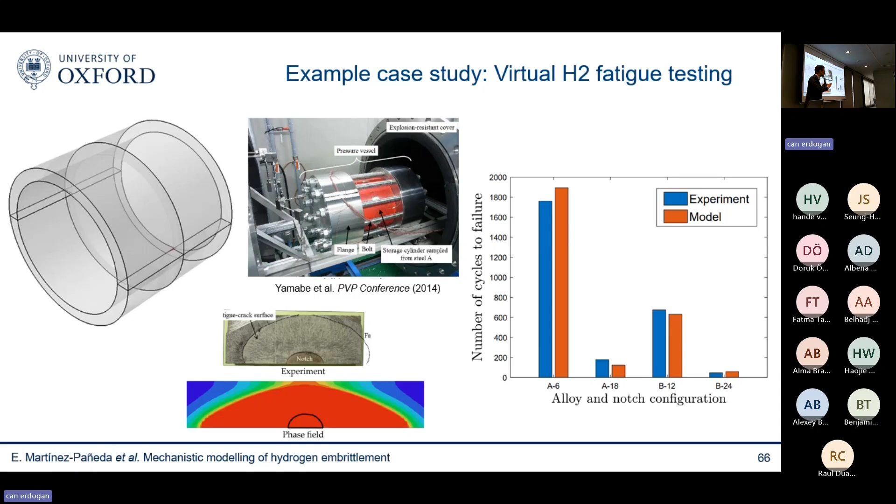As you saw in the newspaper article, in the UK they're hoping to make a decision next year on what conditions will allow them to transport hydrogen. So under what conditions can we transport this? This is the key question.

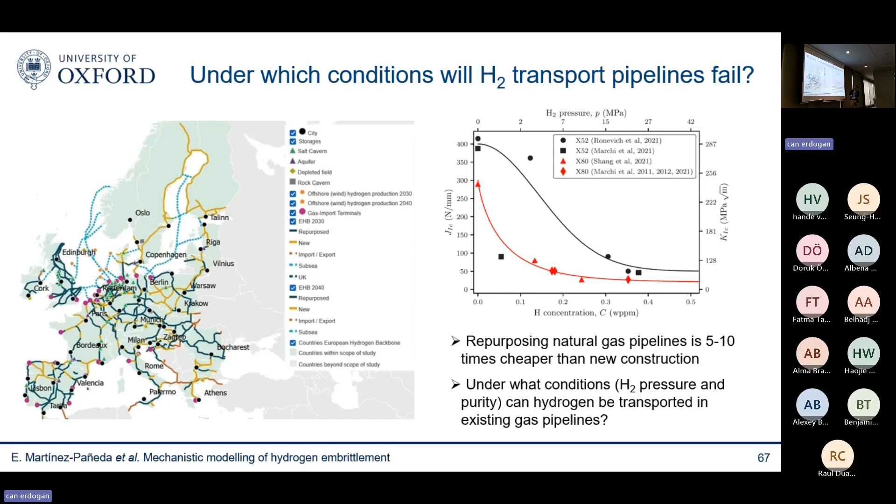This is a very difficult question to answer experimentally for multiple reasons. First, because those natural gas pipelines have been there for decades, there's a quasi-infinite combination of pipe materials and weld materials, with pre-existing defects from corrosion and in-service conditions over decades.

Also, as an engineer, you have a quasi-infinite combination of conditions - you can choose to transport hydrogen at any pressure and any purity you want. So there are many, many conditions, making it very expensive to test in the lab.

The other problem is that the weakest link is the welds. It's very difficult to test welds in a lab because they contain residual stresses, as we discussed yesterday, and the critical area is the heat-affected zone - it's not possible to extract samples to run fracture tests on the heat-affected zone.

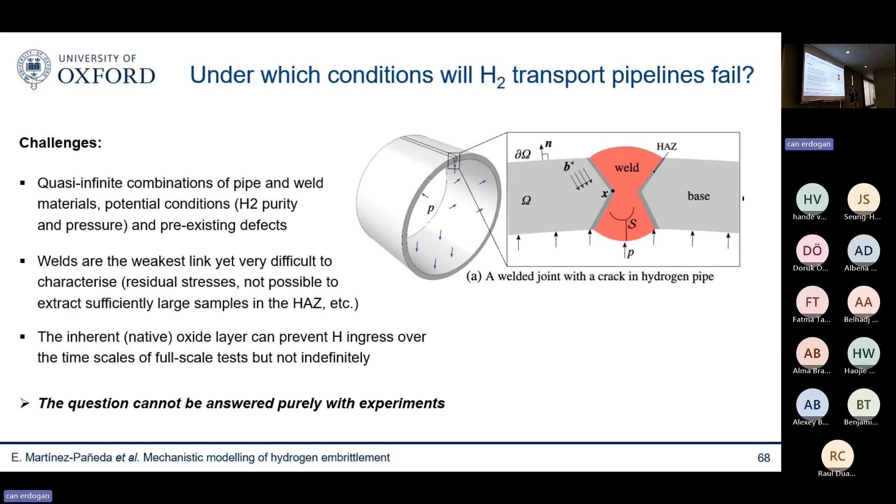And even when you do full-scale tests, which some people are doing with pipelines, it's challenging because you have a native oxide layer that might not be disrupted during the test, preventing hydrogen uptake, but that will be disrupted over the decades of actual operation.

So models seem to be useful here. To answer that question, we created a framework where we combine those phase field models for hydrogen embrittlement that I showed before with welding process models. You simulate the welding process, which gives you a property distribution within your weld - the different phases and heterogeneities.

It gives you residual stresses, and then you run the simulations with increasing pressure and predict when the pipe will fail.

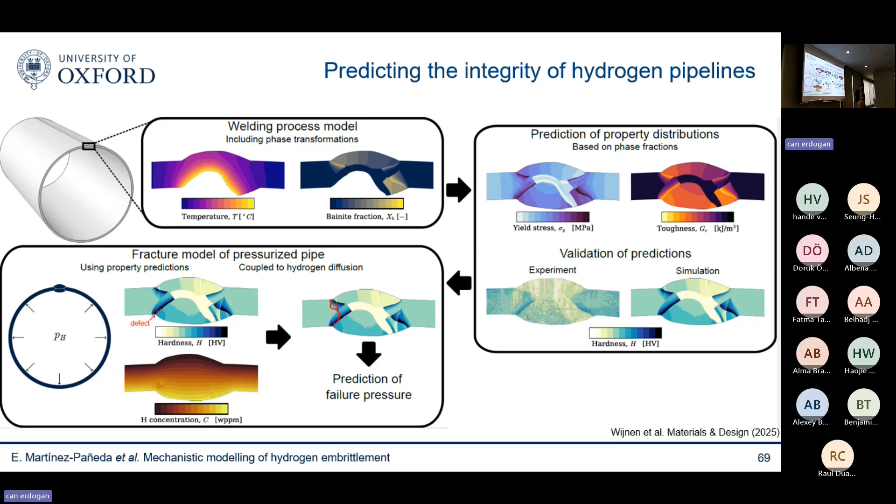So the first step is something new to us. We haven't worked in weld process modeling before, but there seem to be plenty of good models out there, mostly from the nuclear community, and we were quite impressed with the way they work. Even though they simplify a very complex process, they seem to work quite well.

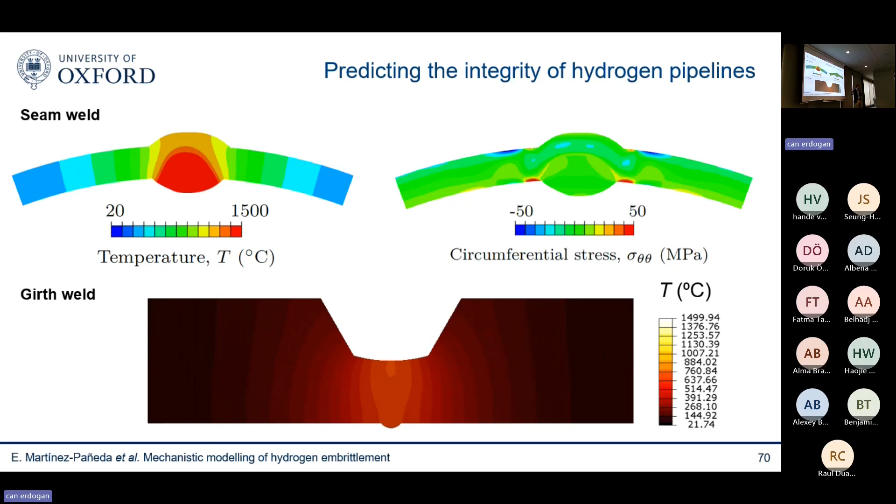Here you see a girth weld with multiple passes, and this is a seam weld with a couple of passes. You're able to predict the phase volume fraction and, of course, residual stresses. Here you see the different phase volumes - austenite, bainite, and so on. Depending on your cooling rate and welding process, you get a distribution of different phase fractions, and from that you're able to predict different hardness levels.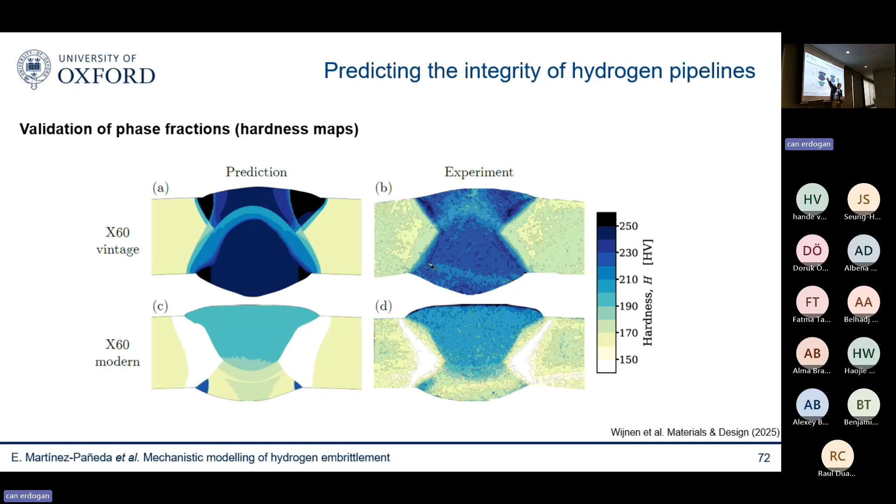You can see in the hardness maps we have regions that are very hard and brittle in our pipelines, and these are the regions that are going to fail first. So if you're quantifying the hydrogen embrittlement of your base metal, that's not going to be the weakest link - that's not what fails first. You need to worry about that.

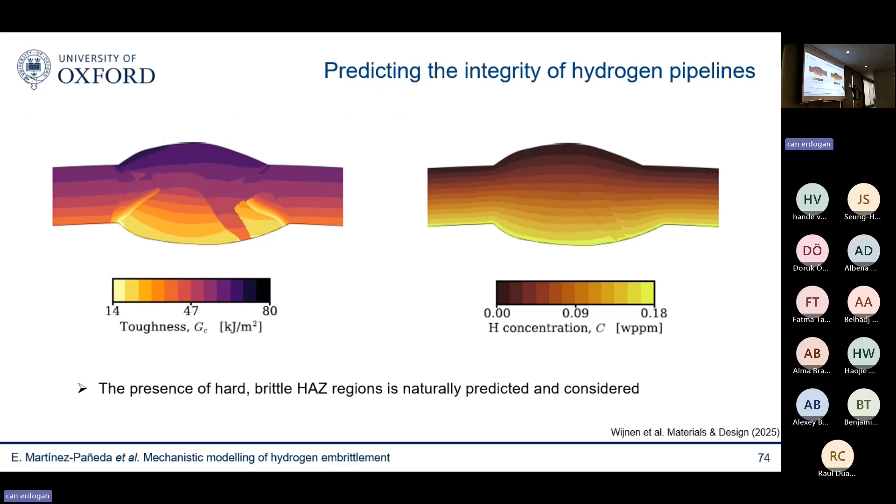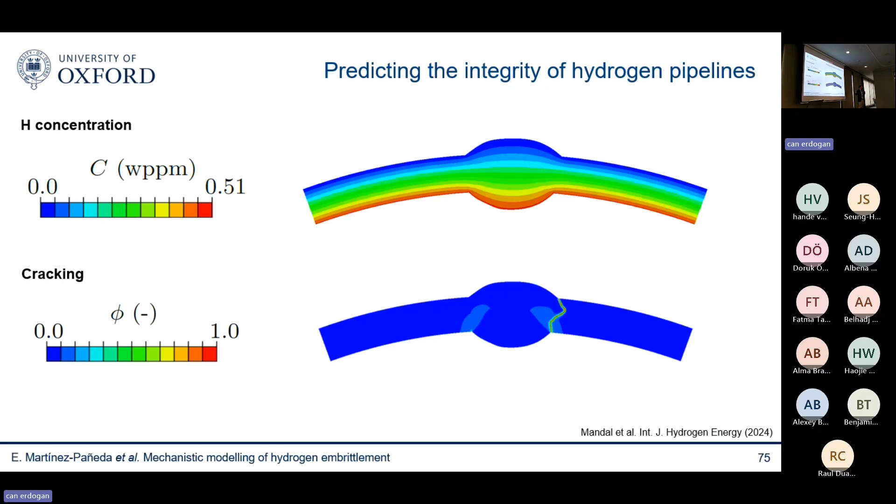We're increasing progressively our pressure, 100% pure hydrogen, and we're seeing when a crack will develop. Eventually, as you see, pop - a crack pops out, and your pipeline has failed. So this is good because then we can test a wide range of conditions.

For example, we went to the welding standards, and the welding standards let you pass your weld with certain admissible defects. So we incorporated all those admissible defects that we know exist in natural gas pipelines because the standards allow for it, and we quantify whether they were problematic with hydrogen or not. Once you have a model, this is very easy to do - you put whatever defect you want, run the simulation, and see what you get out.

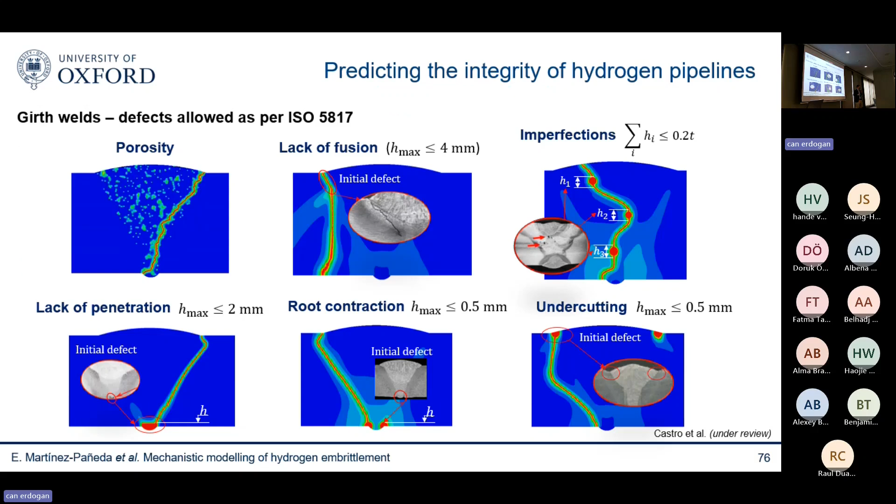I don't have time to go through the details, but we learned a number of things. First of all, defects matter significantly. As you'd expect, residual stresses also matter significantly, and microstructural heterogeneity matters too. This wasn't 100% clear before, but it seems to be clear now.

What we found quite interesting is that when you have a critical defect of 3 millimeters along a hard heat-affected zone - something we have seen on natural gas pipelines taken out of service - your failure pressure could be as low as 15 megapascals. This is problematic because 15 megapascals is one of the numbers being discussed in the industry to transport hydrogen.

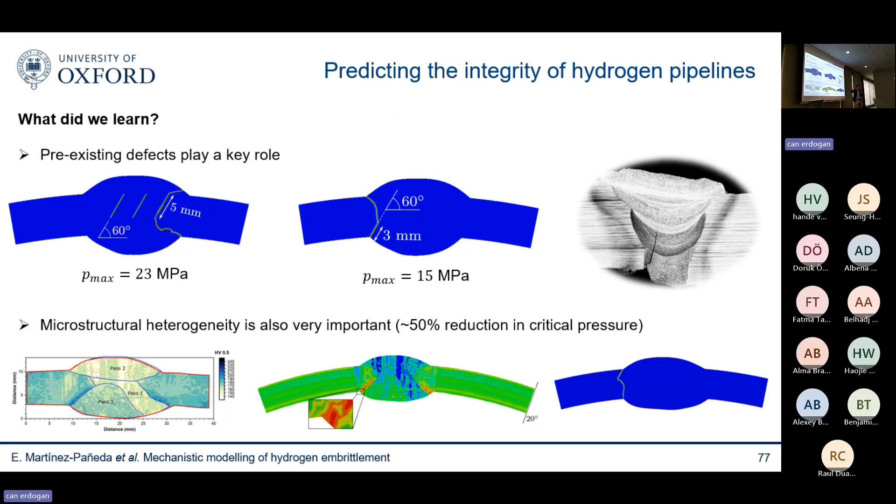What I find quite interesting is that we published that paper last year, but a few months after, they ran a full-scale experiment on a real pipe where they introduced a small notch, a 3 millimeter notch along the heat-affected zone in a weld, and they saw a failure pressure of 12 megapascals. So it seems that the model, running months before under slightly different conditions, was not too far away from the practical case.

Before I finish, thinking a little bit about the future. I was hoping to present a little of this today, but it's still very much ongoing work. Sometimes people ask me, what's the future going to look like? I think you'll notice that so far we haven't looked that much into the microstructure.

The reason is that a lot of these applications, if you think of oil and gas, traditionally hydrogen has always been a problem for very aggressive environments, situations where you already have deep defects to start with. So you didn't really care about the microstructure. However, now with the push for hydrogen aviation, two new problems come into play. One is the microstructure. We're going to deal with very clean alloys, where what matters is the initiation of fatigue cracks, which is very microstructurally dominated. So we're going to have to take these tools to the microstructure.

These are some representative examples of what we're doing these days. You can extend these continuum level tools. You can use them with crystal plasticity. You can use them with new theories that we have to capture segregation to grain boundaries and cracking.

So they're suitable for those types of problems, at least CPFE type calculations. The other problem, which I didn't want to show data on today but is still very much ongoing, is that everything I showed you before was isothermal. We only cared about hydrogen under isothermal conditions, which are typically the worst. But now, due to the application in aviation, we're going to go to very low temperatures related to hydrogen storage as liquid hydrogen, and very high temperatures, because they're going to burn hydrogen in the engines. So all the complications you have in superalloys, the high temperature, the demanding conditions of engines, now you need to add hydrogen there.

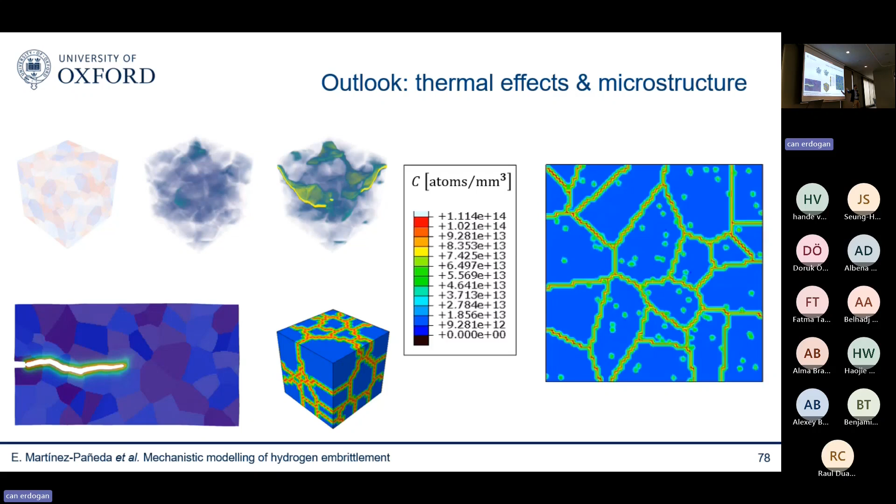So I foresee a lot of interest. I know the local group here is doing good work in this sense. I foresee a lot of interest in combining these tools with microstructure, crystal plasticity, and thermomechanics.

So just to finish, I would say that these phase field ideas and multiphysics modeling can be combined to develop mechanistic tools that allow you to resolve the mesoscale physical processes as they happen in reality, and that allows you to minimize assumptions and deliver predictions based on parameters that we know quite well: diffusivity, toughness, stress-strain curve behavior of the material, and so on. I think the framework is quite general. I know there's a lot of people out there who disagree on my interpretation of what hydrogen embrittlement is, but they can also take the framework and implement whatever they think is happening in hydrogen embrittlement, and people have done that.

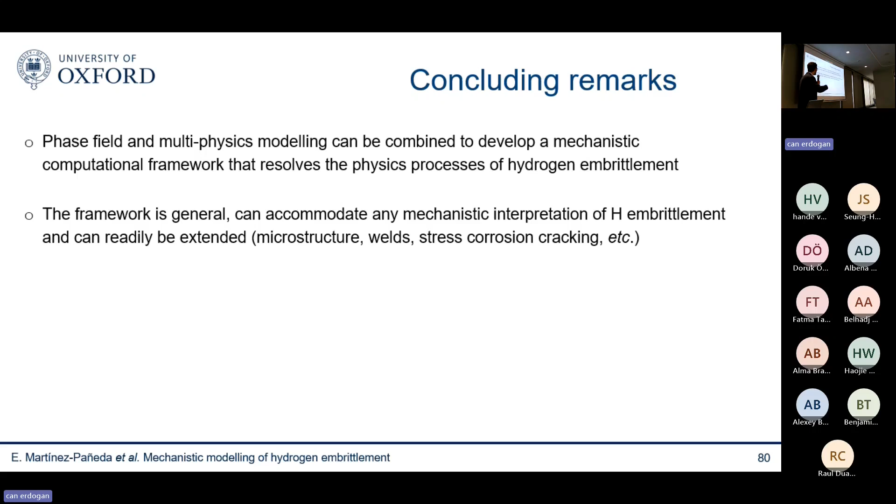You can also combine it with microstructure simulations, welds, stress corrosion cracking. It's a very general framework in that sense. And the beauty of being a continuum level framework is that, well, maybe you don't get as much insight as lower scale simulations, but you are able to take this to the practical case. You can do virtual testing in hydrogen containing environments. In fact, as I've shown you before, these models are now being used to design pressure vessels for hydrogen storage, and also to make decisions on under what conditions it will be safe to transport hydrogen in natural gas pipelines in the UK. That's all.

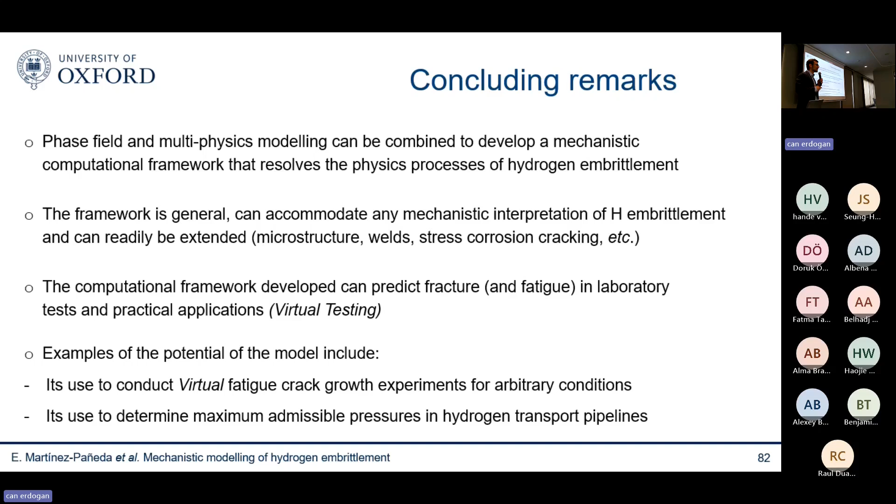The last thing I would say is that all the codes we developed are all made freely available. We work with some commercial packages like Abaqus and Comsol. Comsol's latest hydrogen model is based on our paper, but we also use in-house codes in C++, MATLAB, Julia, FEniCS, and so on, and they're all made available. So all the results I showed you today, you can reproduce at home. That's all, thank you very much for your attention. Thank you.